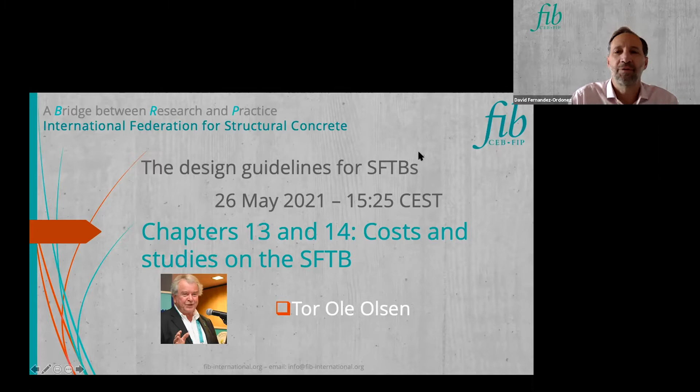Thank you, David. Costs of the SFTB is not so simple. It could have been simple if we had a single number, but we don't, unfortunately.

But we do have a lot of experience with relative costs, and I will try to explain what we know from many studies. Most of the numerical values are in terms of money, but I would like to add that the cost in terms of environment is also important.

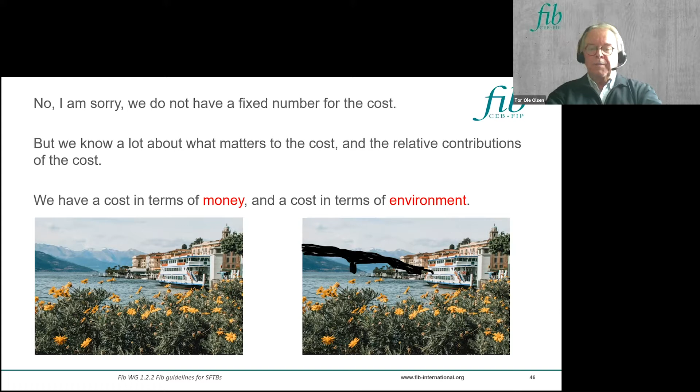I have sketched a bridge on the right picture here. It may not be the most beautiful bridge you've seen, but many people like lakes the way they are, and crossings are one of the environmental costs we need to consider. There are other things in the environmental part.

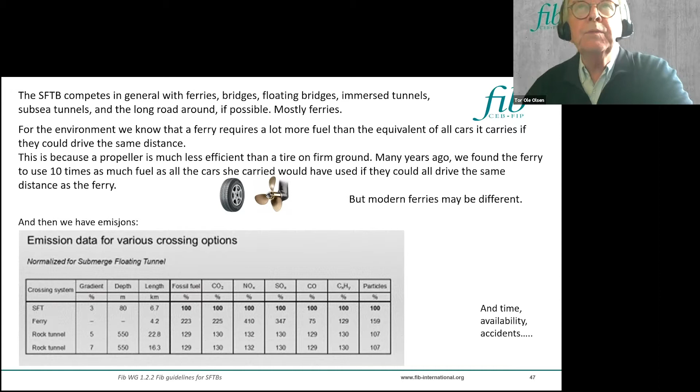In general, the SFTB competes with ferries, bridges, floating bridges, immersed tunnels, subsea tunnels, and the long road around, if possible. But predominantly, it is ferries that is the used solution. We know that ferries require a lot more fuel than the equivalent of all the cars it can carry, if those cars could drive the same distance. This is because a propeller is much less efficient than a tire on firm ground.

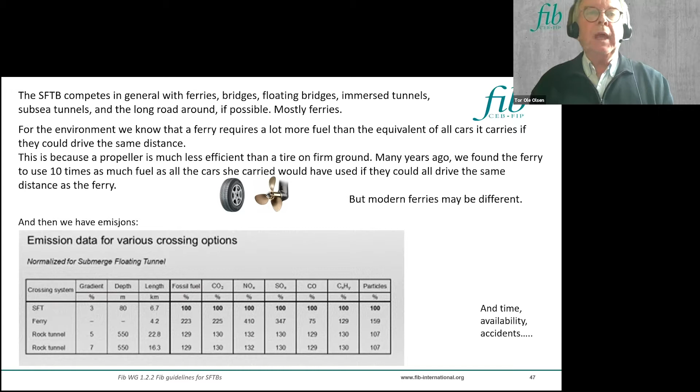Many years ago, we calculated that fuel consumption was 10 times as high for a ferry, but modern ferries may be different. Then you have emissions of all sorts of gases, which shows that the SFTB is very, very favorable.

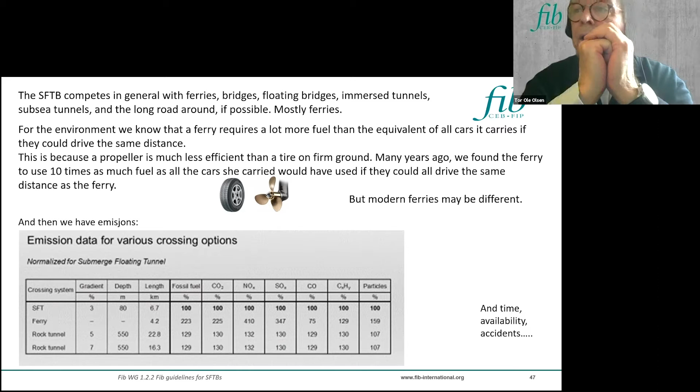In addition, you have time, availability, and accidents. We know that it's often a race in our country to reach ferries, so accidents, availability, and time are important factors.

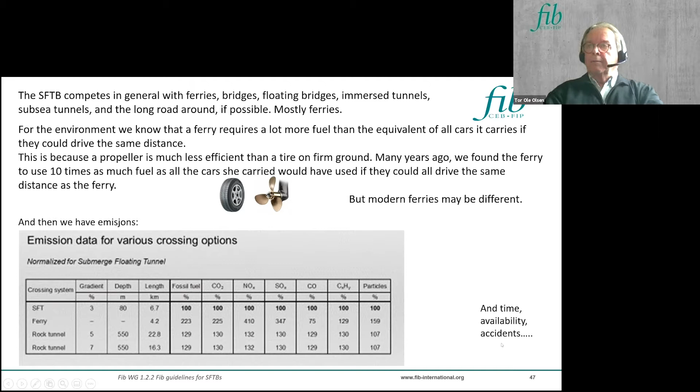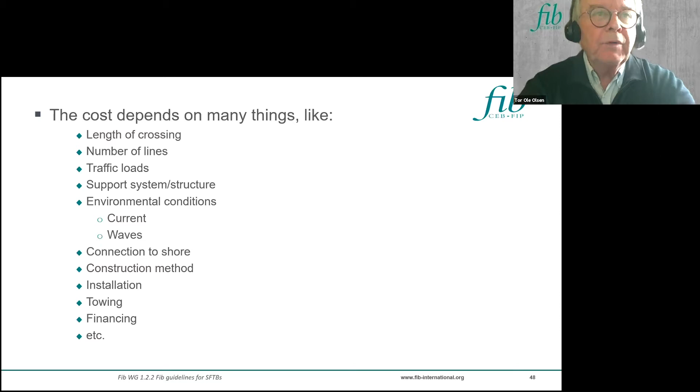The cost depends on many things: among others, length of the crossing, number of lines, traffic loads, support systems and structure, environmental conditions, currents and waves, connection to shore, construction method, installation, towing, financing, and others.

Large structures need a graving dock to build at least a part of the structure. This graving dock requires space and represents a major cost. Construction is a major cost of the SFTB.

Gordon showed you the construction of the Femern immersed tunnel, and the impression is that it's not very inexpensive. If you have smaller structures, you may do with smaller expenses.

You can use a ship dock if suitable, or an ordinary dock with subsequent wheeling to a barge for submergence. You can lift elements, build on a barge for subsequent submergence, built by elements lifted together by crane, or use purpose-built structures. Obviously, the facility of the contractor is important for the execution of the project and also for the design. Therefore, integration of design and construction is very important.

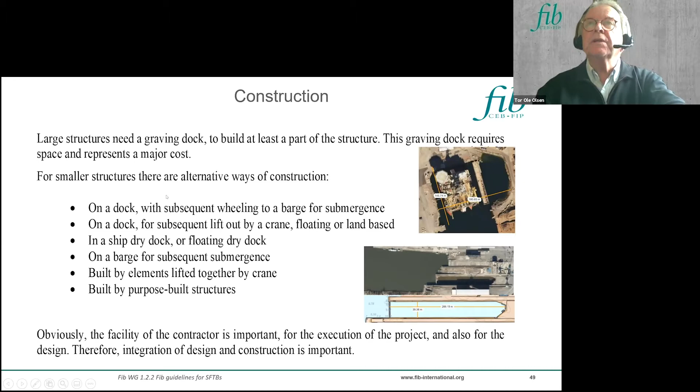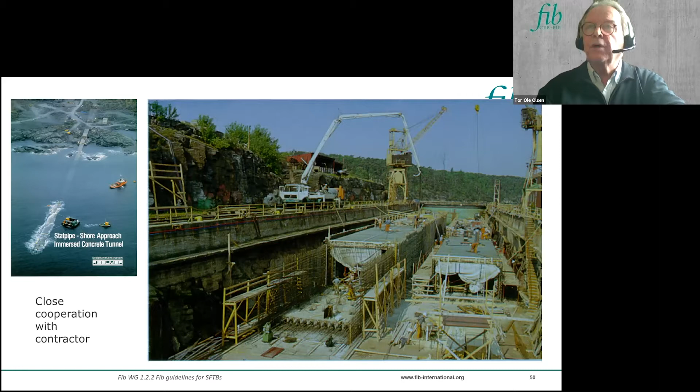This picture you've seen before - this is a relatively inexpensive and simple way of construction, a ship dry dock. Up left is another ship dry dock. This is the construction of a sea bath in Oslo.

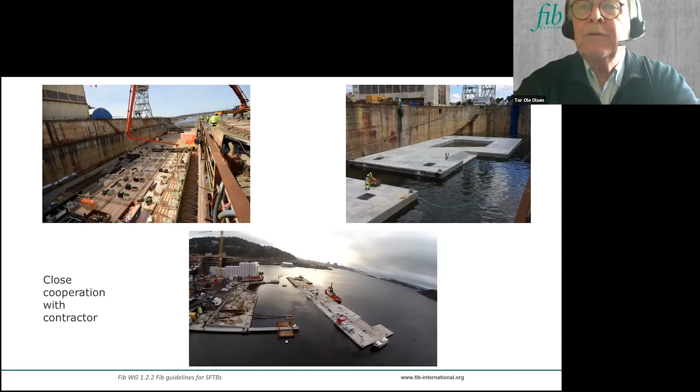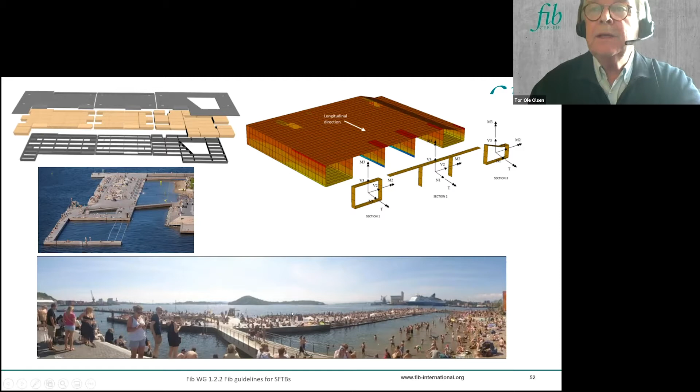Norway has 100,000 kilometers of coastline if you include islands, but even then we built sea baths. We use various techniques, and as you see, it is very popular.

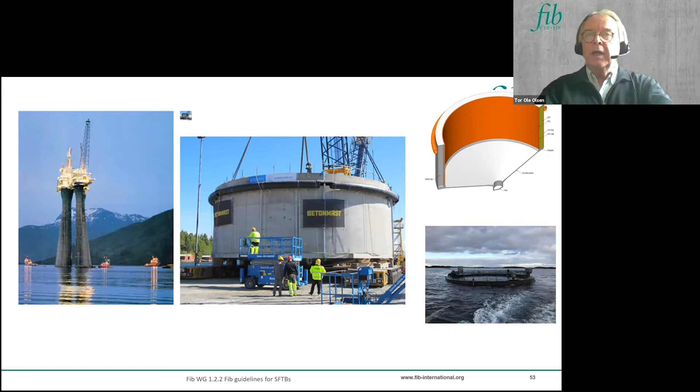These are marine concrete structures in general. The one in the middle is built on an ordinary dock and lifted out. It weighed 250 tons, lifted by a sea crane, as you can see.

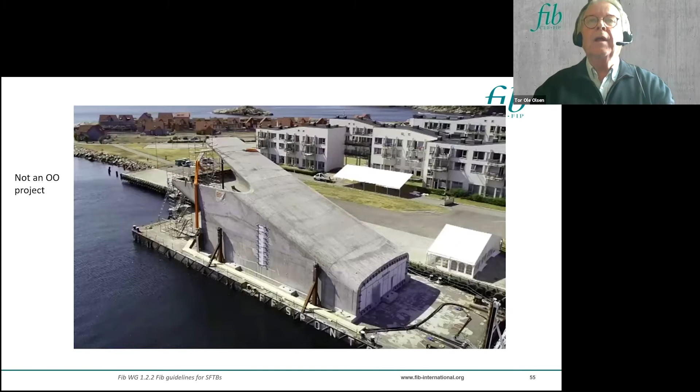Now, for the SFTB, if you compare SFTBs cost-wise as a function of length and compare them with the suspension bridge, not surprisingly, you have an asymptotic price escalation with length for a suspension bridge. For the SFTB, it is maybe more or less constant, maybe even going down a little bit.

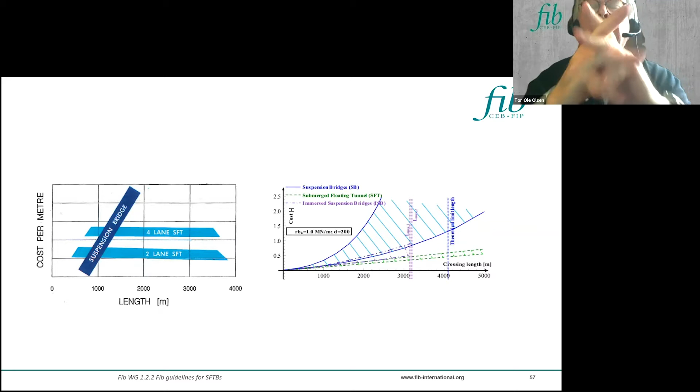To the right here, you see it's a range. You have suspension bridges, submerged floating tunnels, and immersed suspension bridges - that is a suspension bridge sitting on floating pontoons.

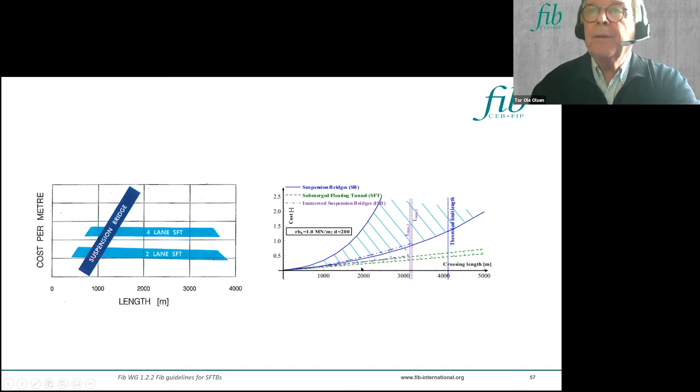Bear in mind that the longest ordinary bridge today is 2,000 meters. You are approaching some asymptotic value for the bridge.

Here we have plotted costs of floating bridges that are built - they are down here, these two. Floating bridge studies are the empty squares, and SFTB studies are the empty circles. The reason for the gap here is that these two floating bridges are single lane bridges; these are double lane.

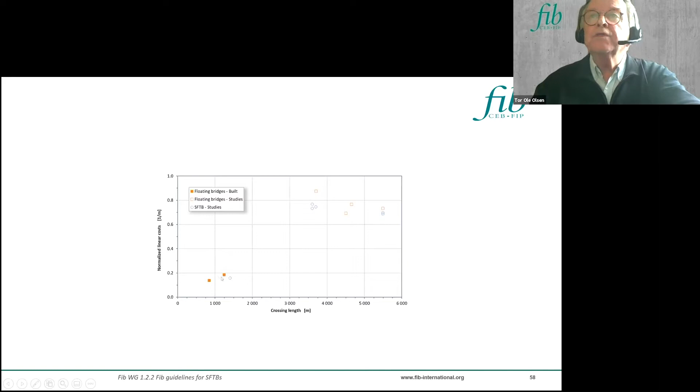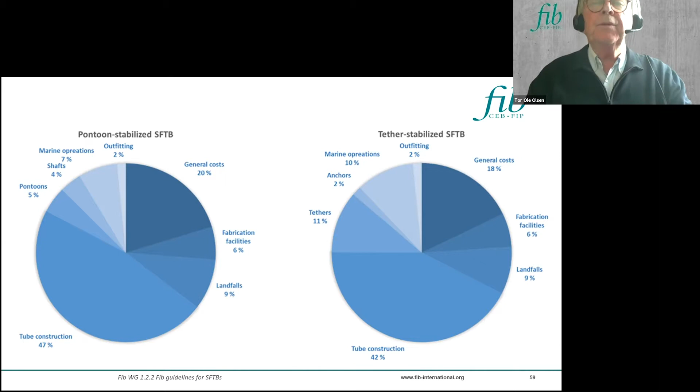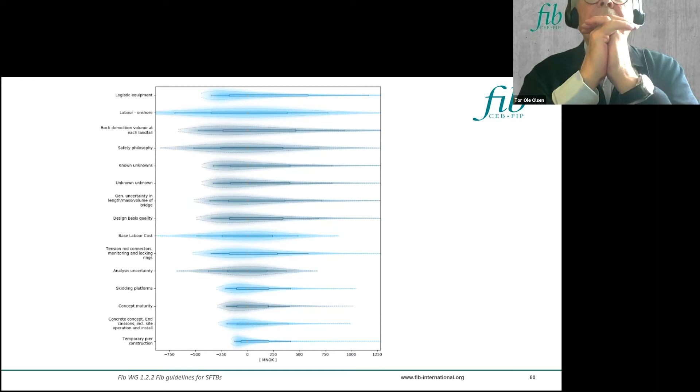So this is something to have in mind when you are planning an SFTB. To further expand on the costs, we have tried to plot uncertainties and risk elements around the different costs. These figures are in the report. By the way, if you're a FIB member, you can read the report on FIB's homepage for free, and you can see all the references and background that has been provided.

This ends chapter 13 on costs, and we continue with chapter 14, studies on the SFTB.

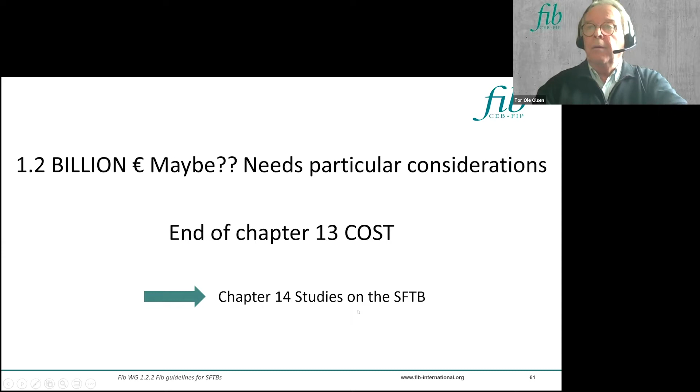Now, studies. I would imagine that a lot of people have dreamed about this type of crossing. It doesn't take more than a boyfriend or girlfriend on the other side before you start dreaming about things like that. You probably recognize the difference between those dreams and what you have heard here today. But bear in mind that the concept of the SFTB is simple. It becomes complicated because you want to go deeper into the details for reasons of safety and finance, and because there are many elements involved, it seems complicated.

Now, this is predominantly from the report. I hope you can share with me that people have dreamed of crossing straits. We have not been able to report on those dreams. We have only been able to report on studies that have been documented and publicized.

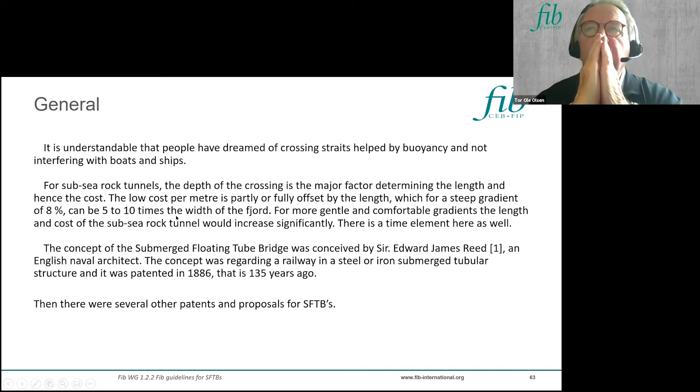For subsea rock tunnels, the depth of the crossing is a major factor determining the length and hence the cost. The low cost per meter is partly or fully offset by the length, which for a steep gradient of 8% can be 5 to 10 times the width of the fjord. For more gentle and comfortable gradients, the length and cost of the subsea rock tunnel would increase significantly.

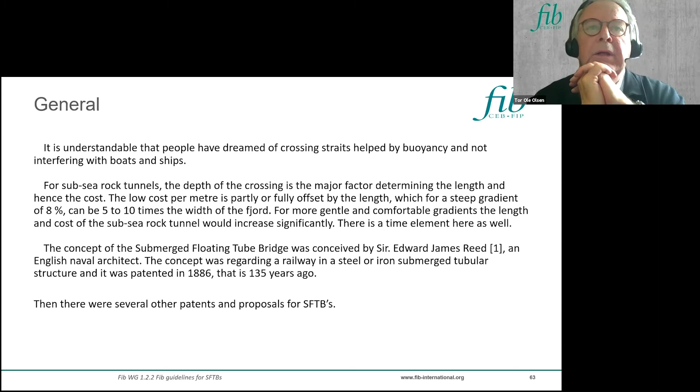And there is a time element here as well. This is another reason for people dreaming about SFTBs. And as Ariana told us this morning, the concept of the submerged floating tube bridge was conceived already in the 19th century, 1886 to be precise, and that is 135 years ago.

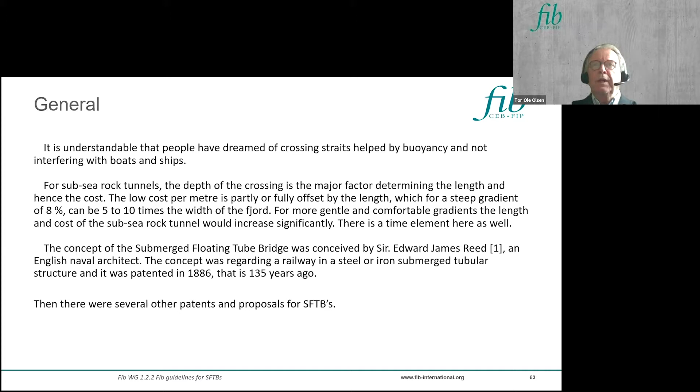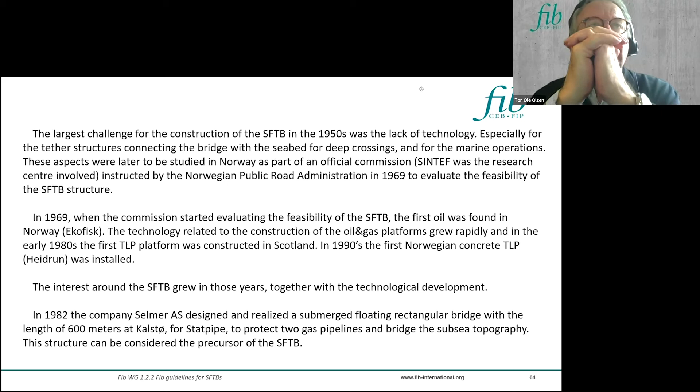And then subsequently, there were several other patents that we have included in our bulletin. The largest challenge for the construction of the SFTB in the 1950s, and this is important, was a lack of technology, especially for the tether structures connecting the bridge with the seabed for deep crossing and for the marine operations. Knowing all the development within the marine discipline and the construction of marine concrete structures that have happened the latest 50 years, we have a totally different background for realizing SFTB now than we had then.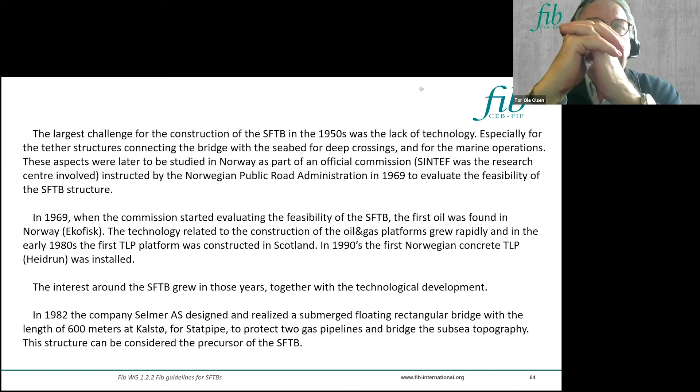In 1969, when the Commission started evaluating the feasibility of the SFTB, the first oil was found in Norway. The technology related to the construction of the oil and gas platforms grew rapidly, and in the early 80s, the first TLP platform was constructed in Scotland. And in 1990, we had one also in Norway. You have seen pictures of this. And the interest around the SFTB grew in those years, together with the technological development.

In 1982, Selmer, a contractor, designed and realized the submerged floating rectangular bridge with the length of 600 meters. You've seen pictures of this, to protect two gas pipelines and bridge subsea topography. This structure can be considered as the precursor of the SFTB.

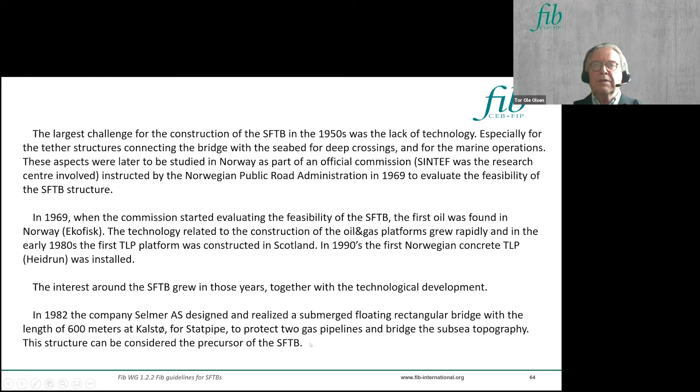We have done many studies in Norway, and there has been many studies performed in lakes in Central Europe, at least that I know of. And there are different reasons behind the interest in studies on the lakes compared to Norway. In Norway, we have some topography and geography that makes it sometimes almost necessary with the SFTB. In the beautiful Central European lakes, there are some other stakeholders.

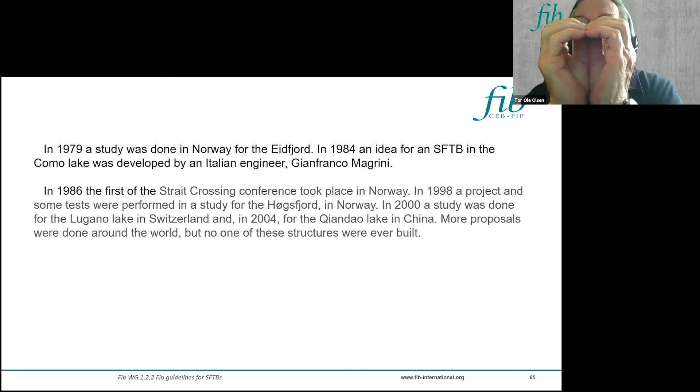Important also is that in 1986, we arranged the first strait crossing conference, and in 1998, a project and some tests were performed in a study for the Høgsfjord in Norway. In 2000, a study was done for the Lugano Lake in Switzerland, and in 2004 for the Qiandao Lake in China. More proposals were done around the world, but none of these structures were ever built.

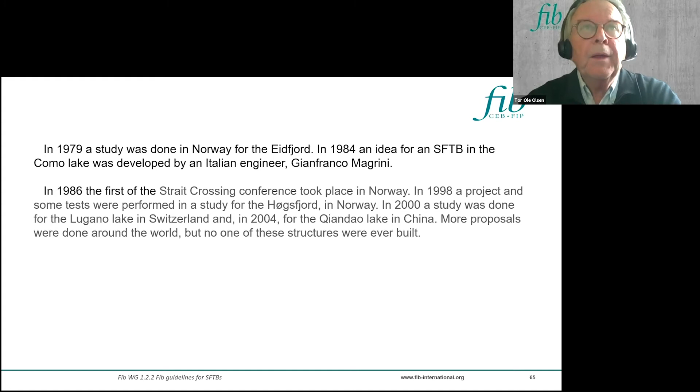I think I would like to give credit to the Norwegian Road Administration for being so, shall we say, brave to go in the forefront of this. We need those solutions in this country, but it takes also some guts to go all in.

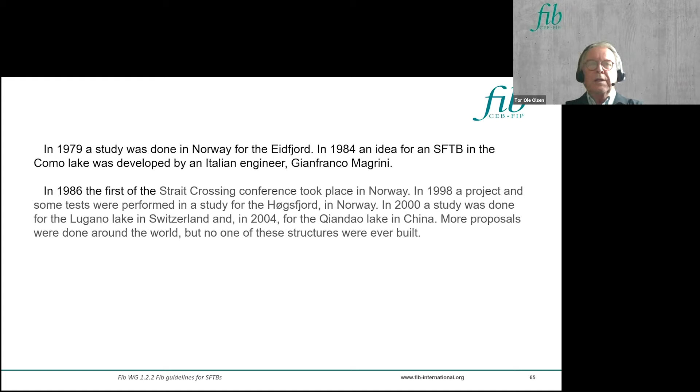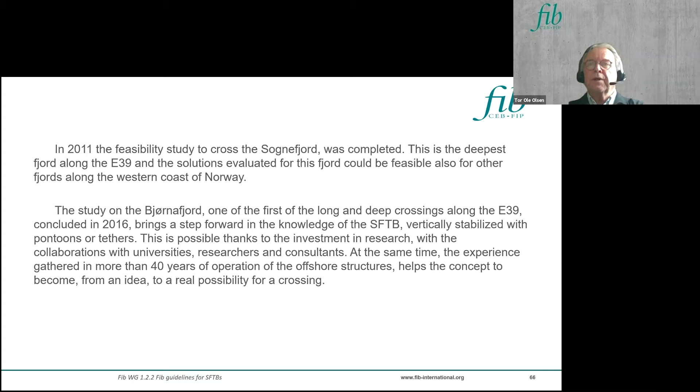We have heard about studies, Sognefjord and other places, Bjørnafjord, and a lot of effort has been put into these studies to learn more and to make sure that the risks are acceptable. We have heard about the Söderström tunnel in Stockholm, and we have also heard about SFT across the Golden Horn in Istanbul. That is not going further at the moment.

And in the last year, several studies are ongoing on the SFTB, especially for long and deep crossings. Some of them are evaluations for use of the structure in a specific crossing, by the Norwegian Public Road Administration, ARUP, and others. Others are related to research projects, like the one in Korea.

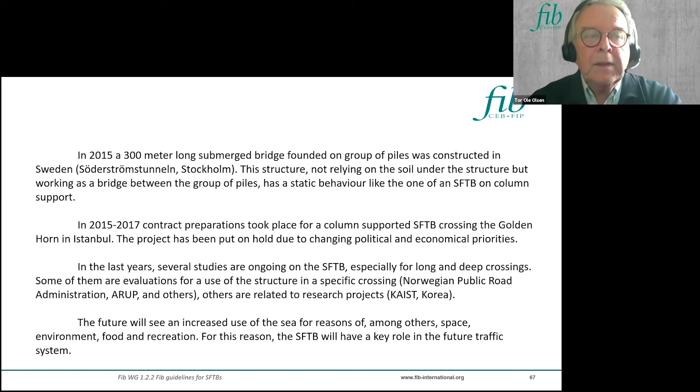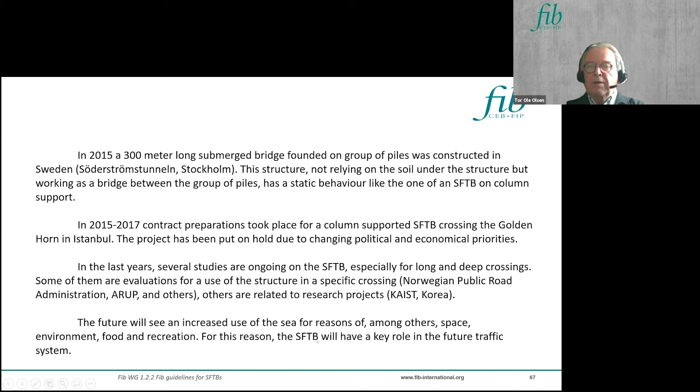And it is my belief that the future will see an increased use of the sea for reasons of, among others, space, environment, food, recreation. And for this reason, the SFTB will have a key role in the future traffic system.

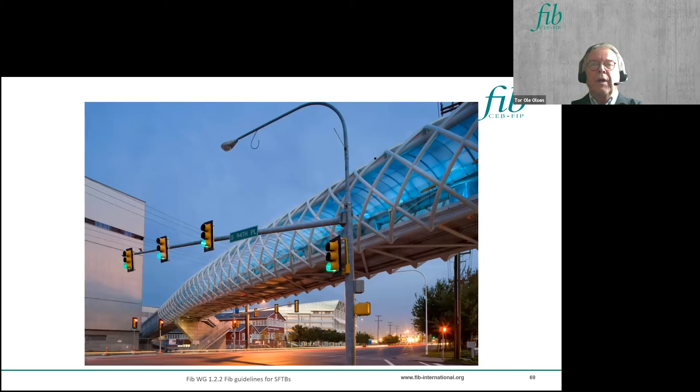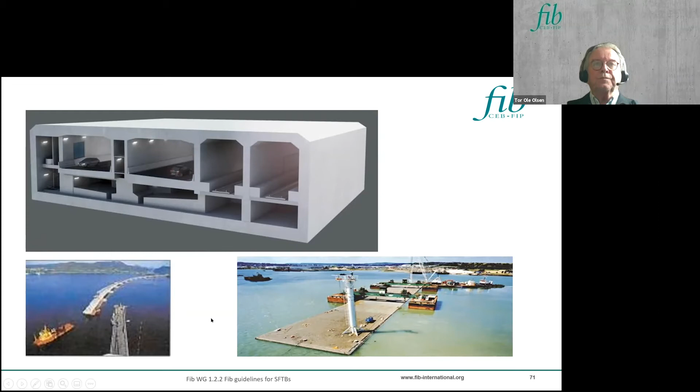We have seen references that we have learned and can learn a lot from the construction and installation of immersed tunnels and also of floating bridges. Lately, several people have started looking at the Hyperloop, which in principle is a tunnel, predominantly planned going in air. You need the tunnel to achieve vacuum inside to achieve high speeds. So that's another type of tunnel.

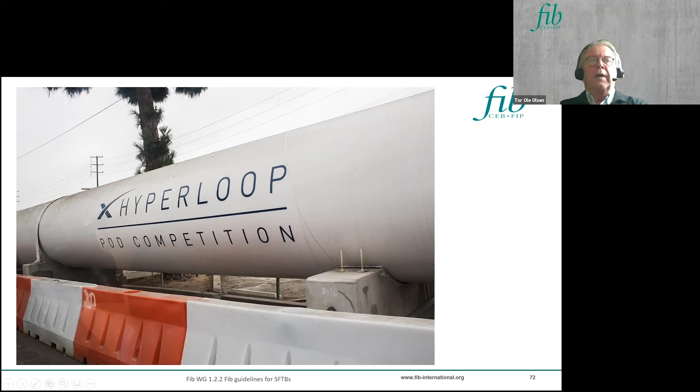This may look like this. You will not like to put this in water, maybe. Quite a bit of interest around this because speed is important, time is important.

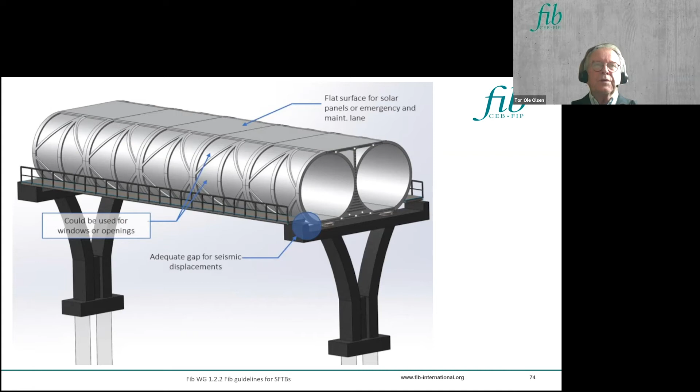Now, these studies are taken directly from the Bulletin 96, and I shall just pinpoint some elements that I think are important for that particular concept and for the selection of it.

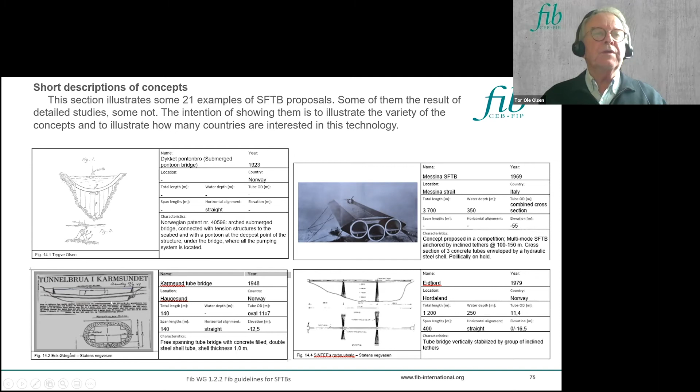1948, we planned - it was a concept for crossing a strait on the west coast of Norway. It was not successful. The Messina we have heard about - quite a bit of studies have been done there.

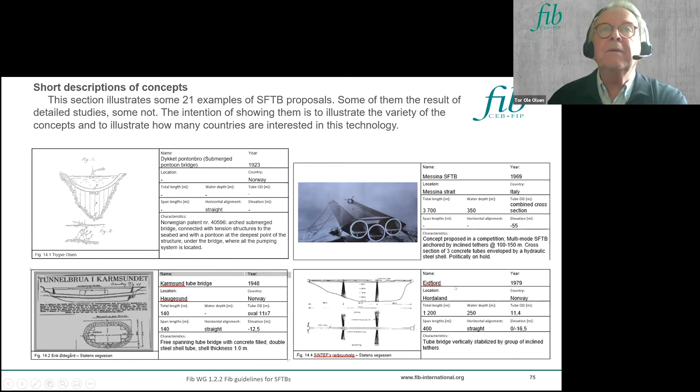Here's another Norwegian study, Eidfjord, 1979. This is the same gas protection tunnel that we have talked about. Normally, in that situation, you would build a rock tunnel, which would take care of both supporting the pipes and reaching reasonably calm water at 30-meter water depth.

But as you know from the oil and gas industry, time is important for financial reasons, and that is why this one was built, to save time. Rock tunnels take a long time to build.

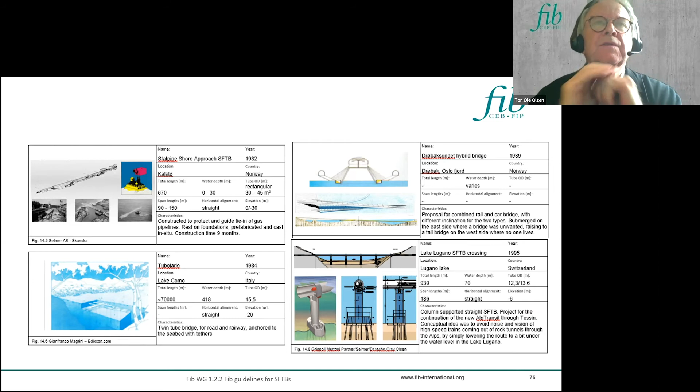Here we have the Lake Como proposal. This one is very special, I think. This is a concept from 1989, suggested by an architect, Snøhetta.

This is crossing the Oslo Fjord, and on this side you have a city. On this side you don't have any people, no one lives there. And at that time we planned an airport on top to the left. The people here did not want a bridge. Here there were no people to care.

So the concept is a submerged floating tube bridge on the end where people didn't want a bridge, and then it goes up as a bridge where people didn't care. And because of the airport, this also has lines for railroad with a different gradient.

This one Stein Atle showed - this is Lake Lugano in Switzerland. Lake Lugano is a very beautiful place, and the idea of having a high-speed railway coming rumbling out of the mountainside was not very attractive.

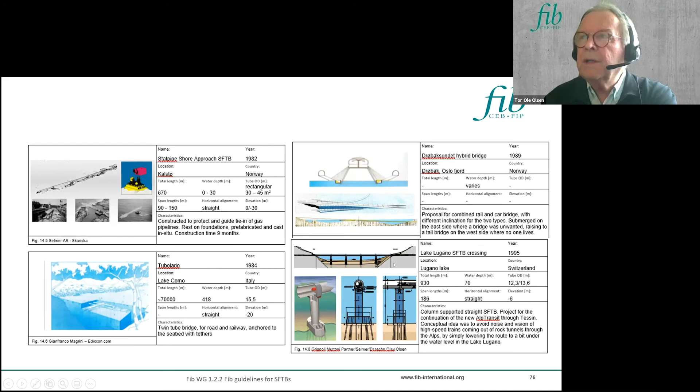So the measure was to just lower the track a little bit so that it went underwater. It is not built. The rail here is called AlpTransit, and they haven't reached this far yet, as far as I know.

This one here has a sort of different anchoring system. This is from China, 1999. This is also from China, 2004. I'm not quite sure if I understand really what this is - you have the tunnel here, and then you have a pedestrian access and a vehicle access.

This is the Høgsfjord study - 4 Norwegian contractors were bidding in the competition. Here from 1999, you have a tether-anchored concept, in this case inclined tethers.

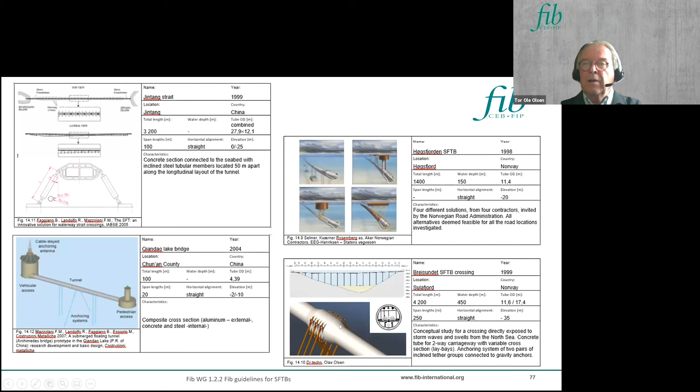Here you have a Japanese concept. And Sognefjorden, we've seen many pictures of already. Stockholm tunnel, we've seen many of, and also Bjørnafjorden.

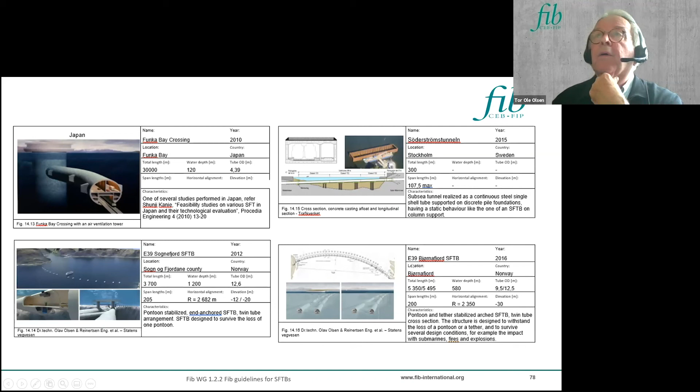This is interesting because this is a hybrid. Here you have a floating bridge over most of the crossing, and then you go in and drive down in this island, and you have a submerged floating tube bridge just crossing here. So this crossing is not very long, and it enables ships to pass over so that you don't have to have a submerged floating tube bridge all the way.

Here is another one. I think Gordon showed us this. That's from Turkey. And up here, another Norwegian and another Norwegian. You've seen these pictures before.

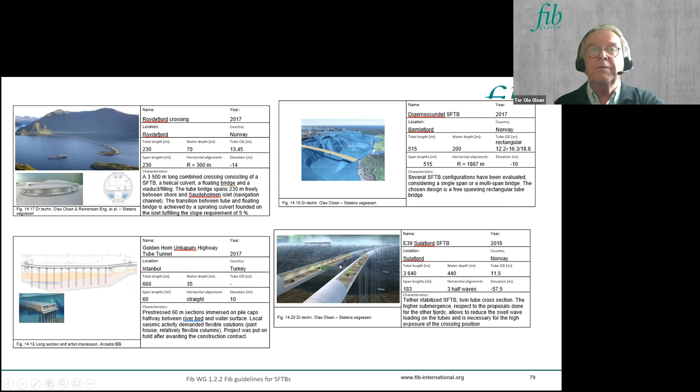And this is another Swiss Geneva lake that Stein Atle mentioned. The lakes are really very deep, so that's why you can have this column-stabilized tubes.

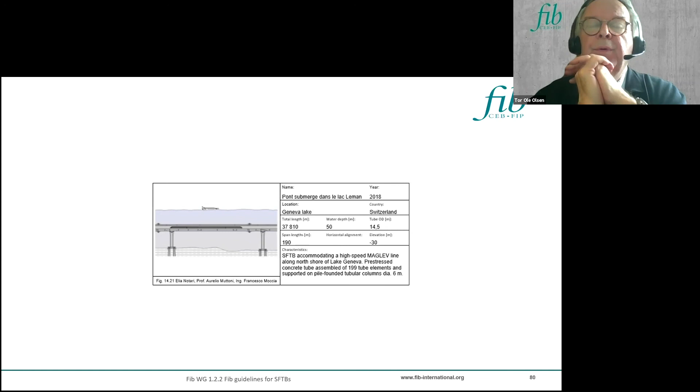So these were the studies, and I hope that you have all enjoyed your day. Take a look at the bulletin - it is very comprehensive. I think whatever you look after, you will find it in there.

Ariana has done a very good job putting it together in a clever way and also in record time. So it has been enjoyable to work with it, and I hope you will enjoy it too.

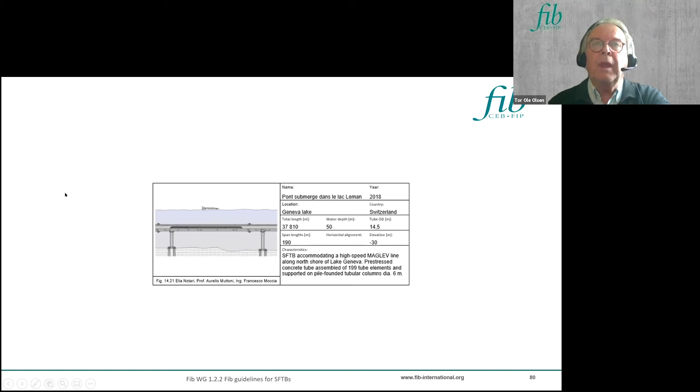So 2 types of technology: trains in vacuum and submerged floating tube bridges. When they asked, I was a little bit hesitant. I thought this was a little bit too far-fetched. But then they added that the idea was that this may be realized in this century. So then I participated and this film was made. Thank you for your attention.